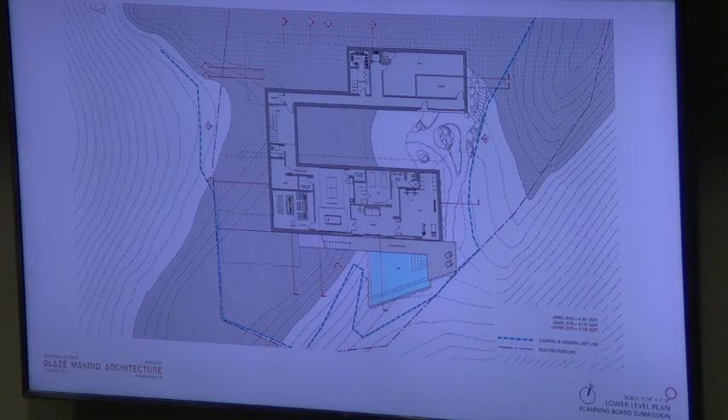We're done. So this area in here was a big focus of our redesign. You can see that the building footprint used to extend into this zone where we had a four-car garage and an exterior lower level parking court, which we've omitted. We also reduced the overall footprint of the lower level with the intention of reducing site impact and soil and rock removals. The big change, which Dan Thorpe will speak to further, was that the driveway grading no longer needs to drop down to get to the parking court, which significantly reduced the length and height of that retaining wall we discussed last time.

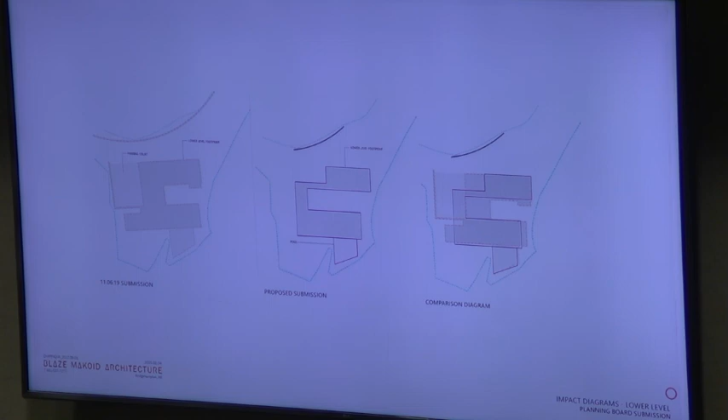This comparison walks you through the overall changes. This light gray area is the previous parking court, the previous footprint. This is the new building footprint. You can see all of these areas outside of that new footprint are no longer part of the required excavation. So the garage will be up here now? That's correct.

These are two section views that help illustrate how this was successful in reducing the soil removals. This section runs north-south through the site, so our previous driveway was grading up to the main level of the house, with lower level garage below. Now we do not have lower level space below a portion of the north wing, and we were able to regrade so that it's a much gentler slope up to the first floor. You can also see this exterior terrace view with the spa was pulled to the north and reduced in size so that we didn't need to remove as much.

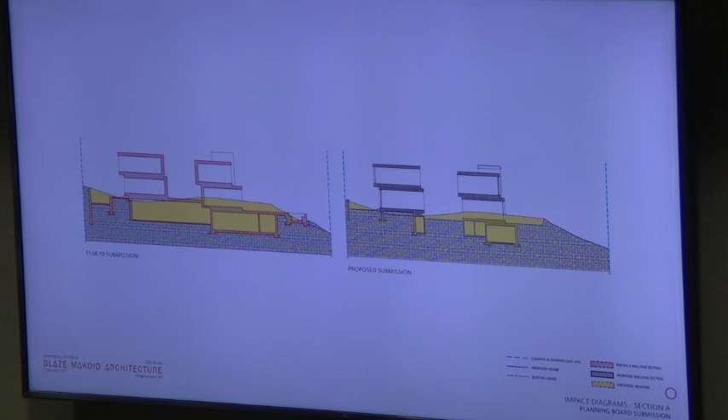Here's another view, sections that are running east-west through the site.

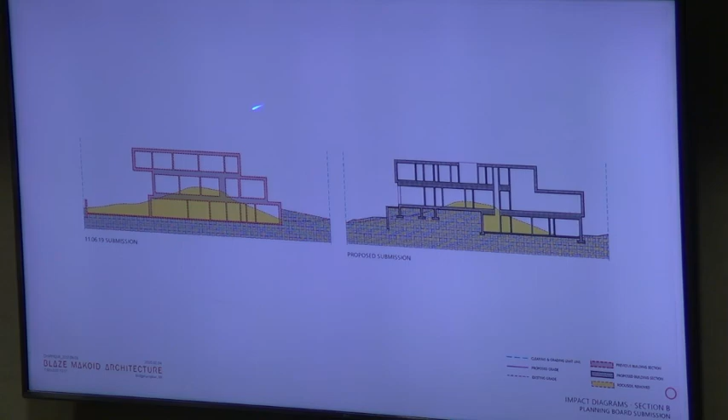And this is that exterior parking court, which no longer exists, so we're able to achieve this condition here. For the most part, that'll just remain untouched, to the extent that you can with your construction. There'll be an overcut for foundations and so forth, but to the extent that we can.

You had a cut last time in here, I thought, there was some sort of cut out there. And now you have this area that I think is proposed to be part, maybe the spa was there, I don't recall. Can I jump in?

Sure, absolutely, come on up. You have to identify and introduce yourself, because it makes it easier for the stenographer.

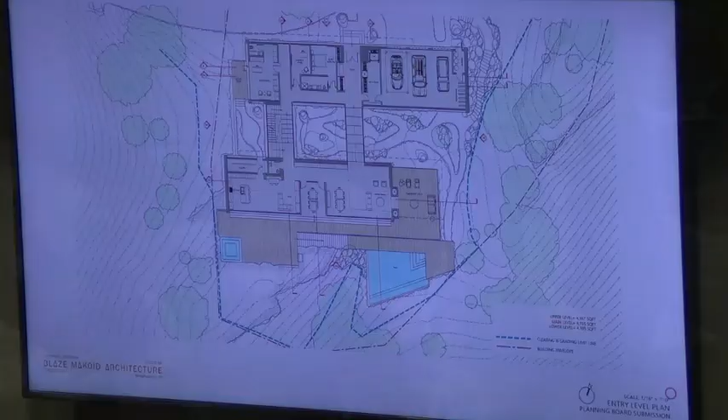Daniel Thorpe, landscape architect with LaGuardia Design Group. That area in question was a concrete stormwater planter. We've since changed it to a deck floating over existing grade, so that we can continue to honor that swale channel down the side of the building. The stormwater planters we saw as obstacles in the way of that swale have since been moved between the two volumes of the building, which Lori allowed us to do by opening that up.

So I think we're really happy with the way that these changes have affected the design. We feel it's actually strengthened the design overall. There's perhaps more clarity in the two volumes, and then these connector bars between them.

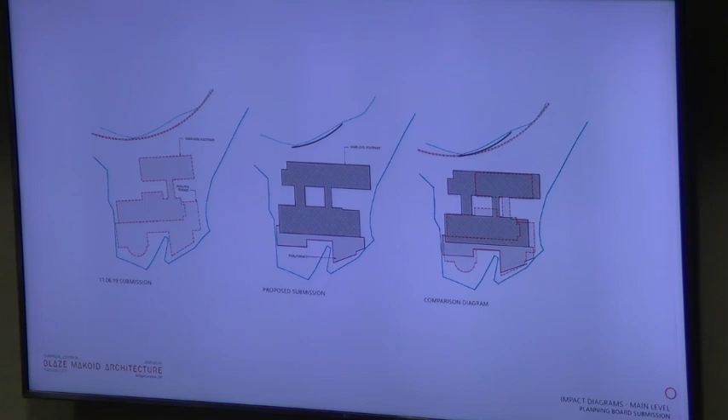This is a view of the first floor, and you can see how those terrace reductions played out before and after. We did rotate it for this overlay, just for the sake of comparison, but we did change the angle of the building.

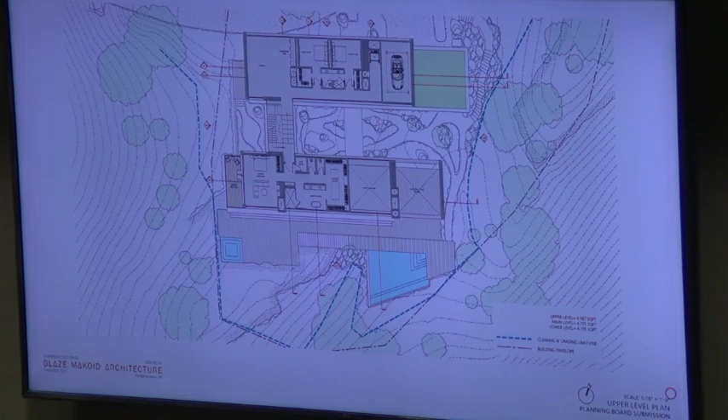On the upper level, the program has remained largely the same. The one change we were able to accommodate was because we lost one garage parking spot, we were able to install an elevated lift, connected to the garage space down below. That's basically a stacker, as you'd see in urban parking. It was a chance to claim some of that space and get everyone what they needed.

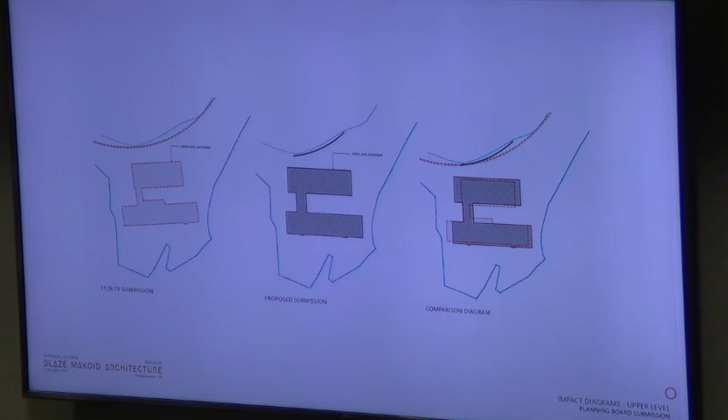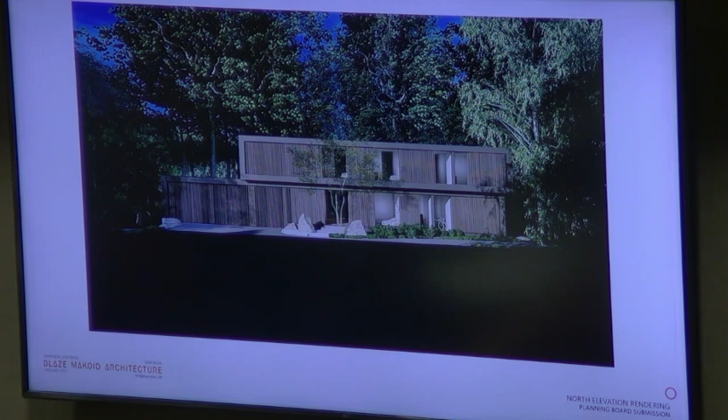And then some renderings. Here's an aerial view looking from the south back at the house. The north elevation—what we'd like to do is kind of conceal those garage doors in the wood cladding.

These next two slides address the history of our submissions to the board to date, starting with November 7th of 2018. As you can see, there's been a downward trajectory in the overall scale of the project, both in terms of GFA. With this last submission, we went up a little because of some of the logistics of moving program around, but overall the building footprint has continued to be reduced in size.

When you reference the floor area, that also could include the second floor as well, right? Correct, and the lower level. Did you count, because now you have a garage, right—is that counted as floor area in this number? We counted everything, including exterior walls and garage mechanical space. So in the previous one it would have counted also the garage parking. Correct, got it.

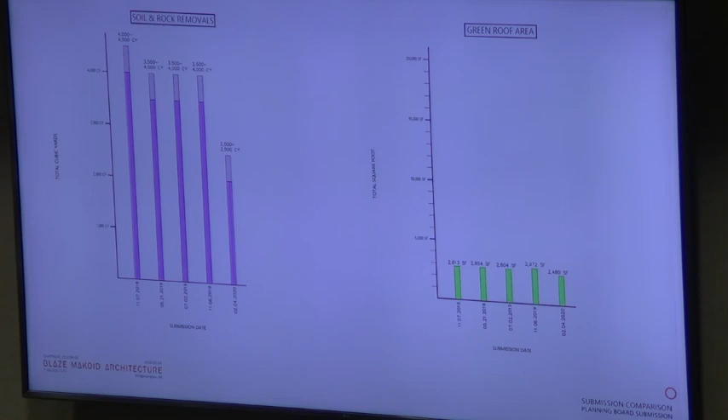This last series of slides addresses the 2002 approval in comparison with the elevations of our proposed house. I think you can really see through these diagrams how the flat roofs help to minimize visual impact.

You can also see how the house has been designed to work with the topography. It's very tasteful.

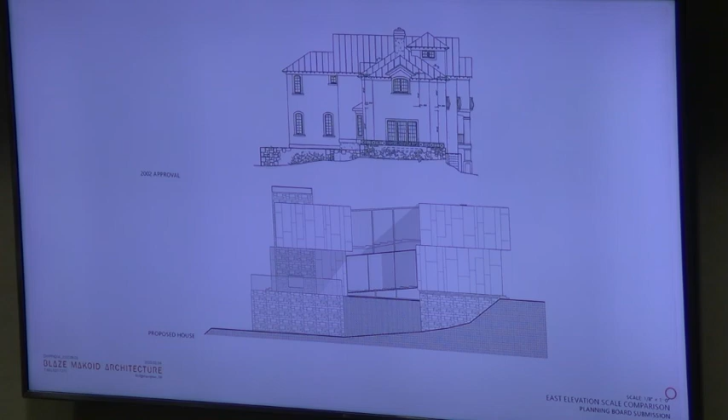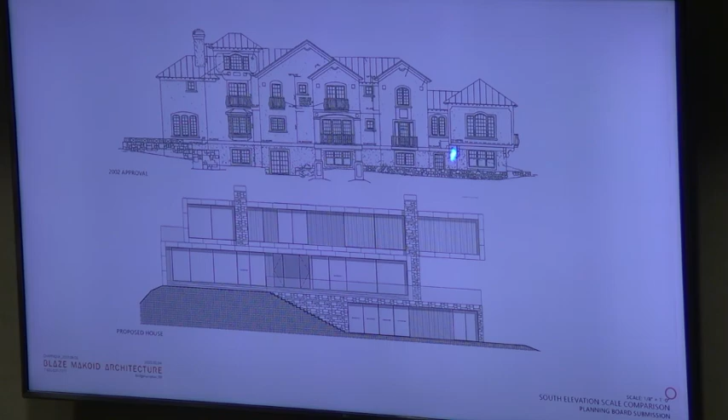This is the view of the south elevation, so this is the view that neighbors across the lake would be at least partially exposed to. I think you can see how, again, the flat roofs are less obtrusive than the gabled roofs. And also, the overall length of the building is less than the previous approval.

Didn't we also talk about the coloration too, in terms of what you're going to do with the siding? Correct, yeah, I think it will really blend in. I do not know, I can't speak to what color this was. It appears to be some type of a stucco. But we're looking at natural wood tones and deep slate. What's represented in the 3D images, right? Correct, yeah.

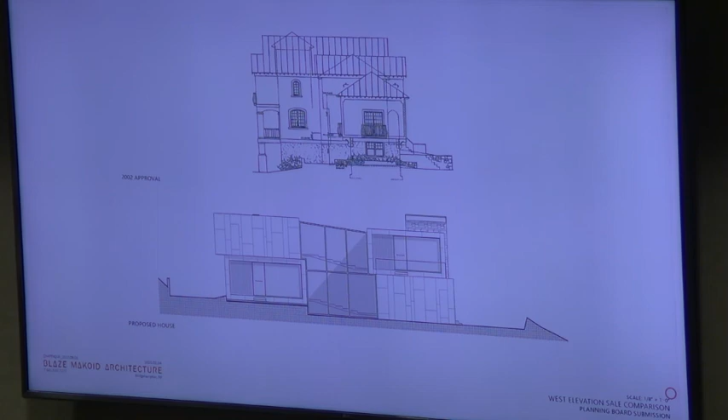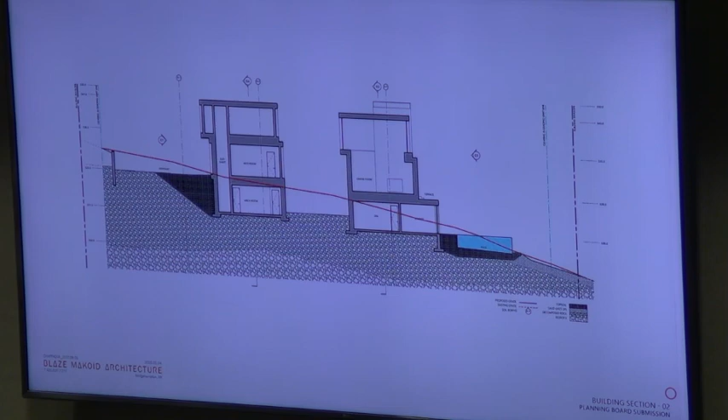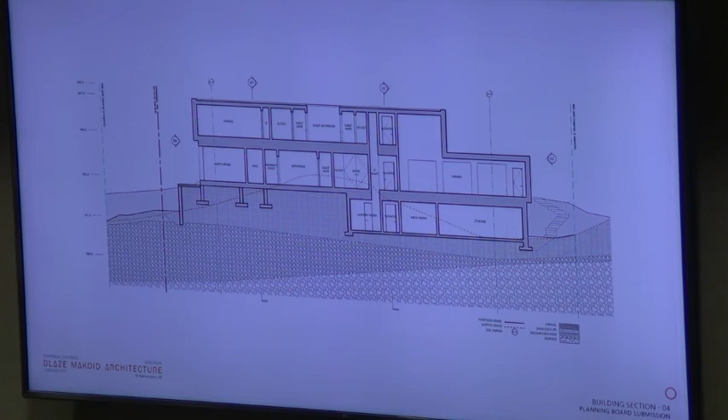And I'm going to flip through these next slides fairly quickly. They were part of our submission, so you've probably seen them already, but we included some sections of the proposed house. That red line is the existing grade through each of these sections. So this is that interstitial space that would slope down. This is a section through the north wing where we no longer have lower level space. Is there a hatch below representing different rock that's there? Yeah, it's kind of an estimation based on the soil borings that we have.

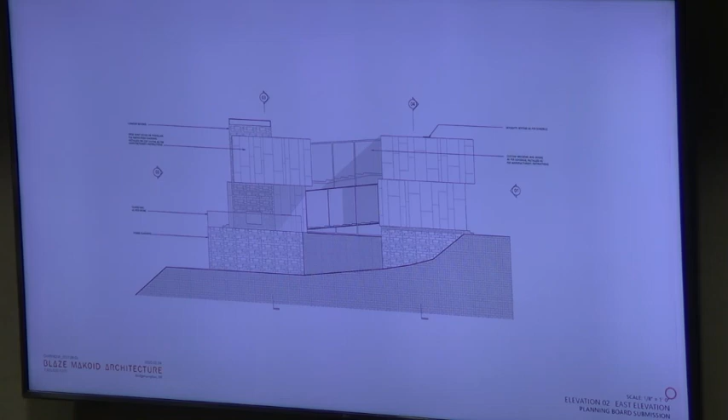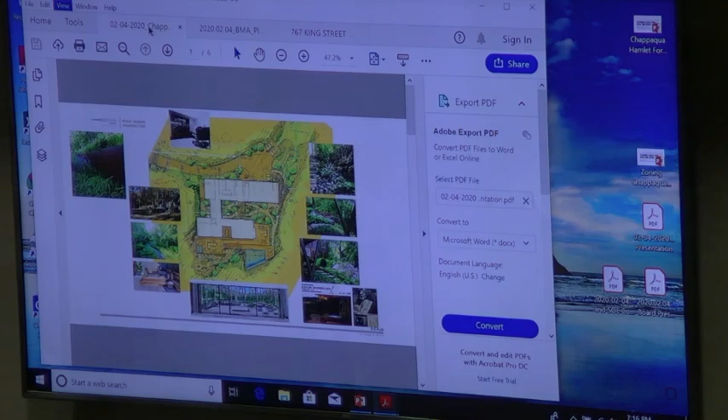You can raise the microphone, looked like it was a little low for you. Thank you. Nice.

All right, landscape. So, again, Daniel Thorpe, landscape architect for the applicant LaGuardia Design Group. So based on the revised building, we've been collaborating with Lori and her team on how to better fit the site design into the existing topography and soil strata of the site.

So one of the biggest improvements we made to the landscape plan was, here's the bridge. Before, you came over the bridge and then you swept down into the subterranean garage. You now drive up, almost even with existing grade, up to a new parking area at the front of the house. So instead of the main parking area being down below, it's up above. This had several major impacts on the overall approach to the house.

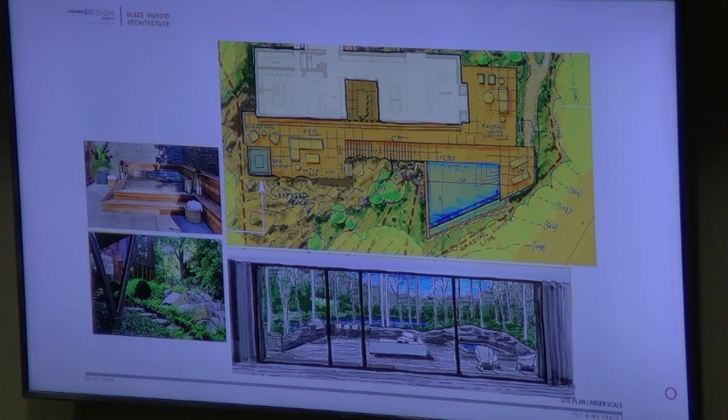Getting back to the upper area, one idea is since we'll be generating rock on site, how we might use that rock around the house. This concept carries through all our plans of bolstering this edge of the house that interacts with the existing flow channel, with hardened stone stairs and rock crushings deposited along that edge to create a more stable environment for the water to run against, as opposed to soft soil and plantings which would inevitably blow out.

This is a photo of our vision for the space between the buildings. These are all of our stormwater planters, vegetated in native grasses, Pennsylvania sedge, native ferns like hay-scented ferns, and little magnolia trees native to New York, the Sweet Bay magnolia. These little trees dance through here. So the idea is using all of the environmental devices we're employing on the site as a visual expression around the building.

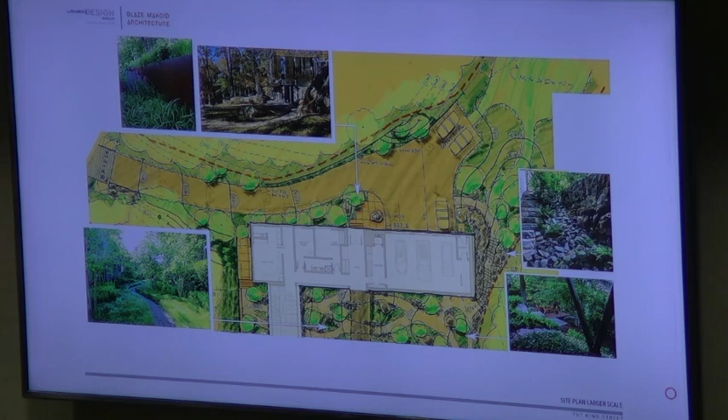This is just an updated tree removal plan showing the building footprint. The trees in red are what would be removed, and in green are all the trees that we're revegetating with.

I just want to ask one thing to make sure I understood. Do you propose to expose this rock below that area where you're going to put the spa? No, it'll be just natural, just the way it is. I'd love to leave it just the way it is. I couldn't tell from the picture if that was one of the things you were going to do below the ledge.

Why do the two trees come out? These two? Yeah. I don't know if those just escaped us as a holdover from the old application. I know we had added a few to the removals list because the board was concerned about the client maybe down the road wanting to remove a few to open up more solar exposure on the pool. So I do know we added a few for that reason, but we certainly look at keeping them on the plan.

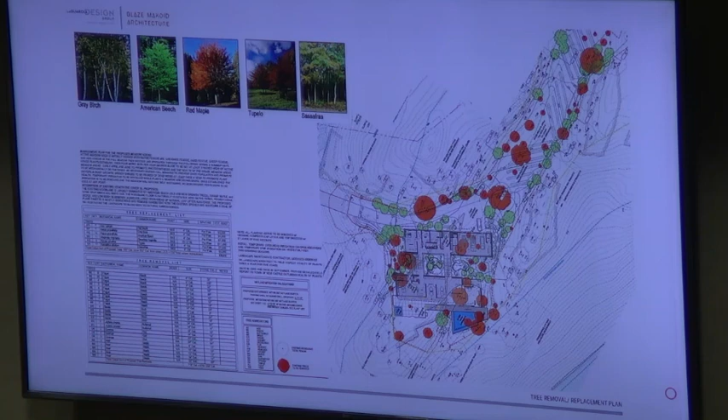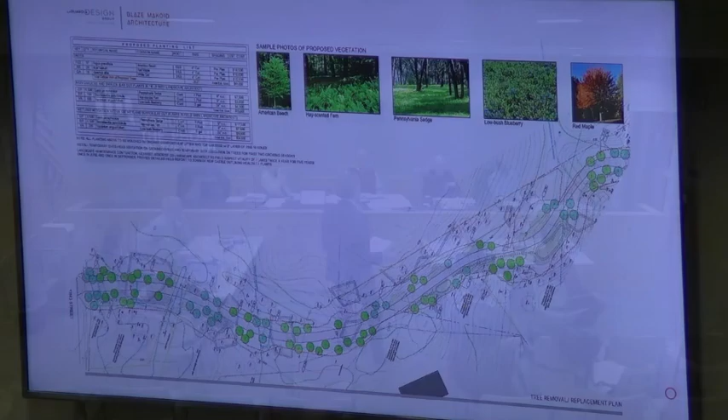This again is just the plan from the bridge to King Street, largely unchanged, entirely unchanged. But I think at our last presentation we didn't really get the opportunity to explain how we're now planting trees within the view shed from the neighbor's house, the neighbor who was here at the last meeting, trying to address her concerns through adding trees and screening between her and the driveway. This is an existing pocket of vegetation, you see the clearing line around there, that was planted many years ago. It's good evergreen screening, so we looked at these other open vistas and how we could populate those with more canopy for further screening. The view from this end of the building seems to go right up to your building.

And the elevations are pretty close. This is, I guess, at 530, and you're going to be building around at 515, something like that. Yeah, and if we go back to the three-dimensional renderings, we have a significant amount of planting between, on that side of the house. Show me, is it this one? No, it's the other one.

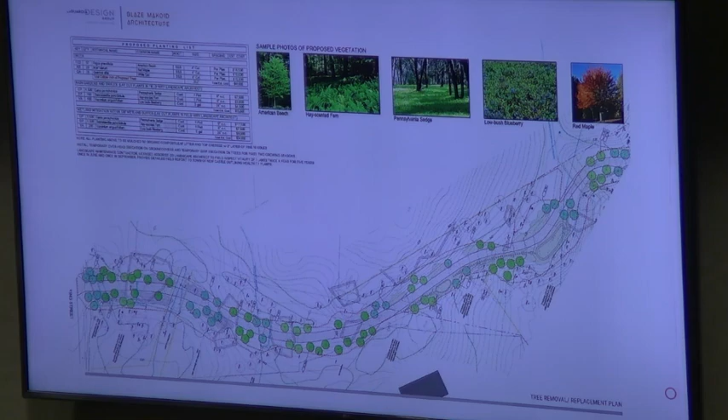I think you're at least halfway there in my mind as to what should be done. This side is of the house - eventually it's gonna be, you know, like the Mayans. They built something and then the trees came back and you can't see the stuff anymore. Which is great. But the building blends in nicely with all the views that you've created.

And I certainly can see that view shed at the bottom, but the view shed on the bottom shows about 22 saplings all around it, unless there's something else.

Well, we have the opportunity within the grading and limit line to add more trees in this zone, which is that kind of angle of attack from the neighbor's house.

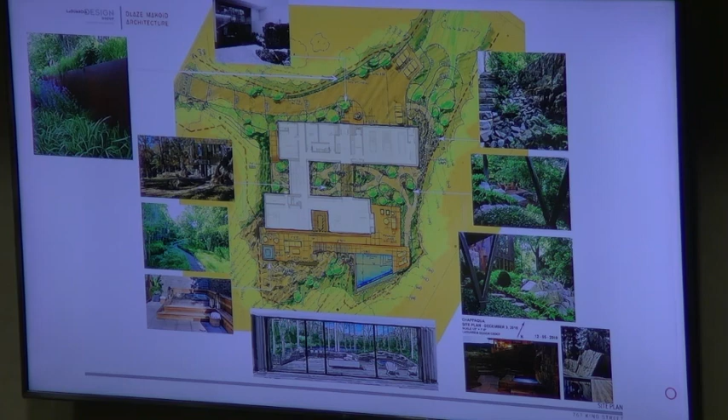In our previous submission, we included a photographic view to the west from that side. And we concluded that you can't even see the existing house in a leaf-off condition when you're standing where the north bar would be. So I don't anticipate that there will be an issue.

That'd be great, but if you could bring a view shed photo and maybe put stuff in it, that might help you decide whether you have to add just a little bit or refine the way it is. Then we have a good record for us that says, hey, this is about all anybody gets.

Which side would that be? Are there many glass, is there much glass on that side which will be lit? No, the predominant - yeah, so, where the light is gonna be - on the west side, the predominant glassy element would be that stair connector.

Okay, yes, this one, right? So is it this one? Correct, yes. That's not gonna be lit 24/7. No, so there's not that much there anyway.

And you had an image up there before that showed how far the houses are from. How far are we from that house? It looks like you're 300, over 400 feet. 490, almost 500 feet. There's a distance limit there, yeah, 500 feet.

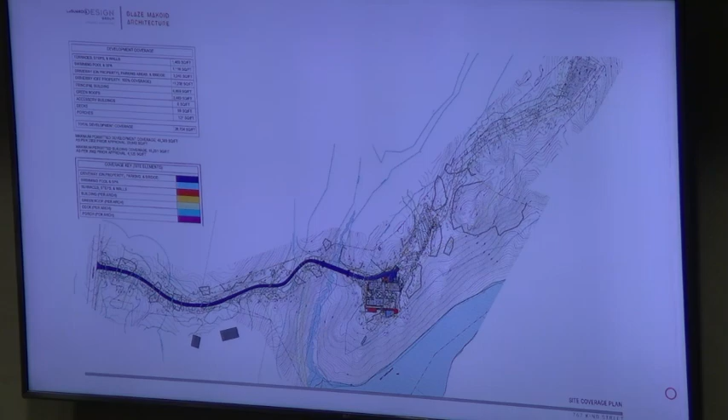Aesthetics, or I just don't know what, but I don't think they're very big because they're in the rock. Right, because trees are strong in the rock. I've been watching one for 10 years - the crack was that much to begin with, and now 10 years later, it's this big. There you go, and it's pushed the rock aside.

All right, so we can continue to look at that area. One other note before I jump off is that the swimming pool - the board had a comment about the depth of the swimming pool, and it's in our last presentation. We've since spoken with the owner about the depth of the pool and the idea that there's really no room around the pool to dive into the water, so we're now proposing the pool, instead of 8 feet deep, be 5 feet deep maximum, which alleviates the downward pressure on the slope, and I think is a good thing for site impacts.

Yeah, that's a good idea. Will that be constructed on site, or is that also something that's prefabricated? That would be on-site - that would have to be constructed on site as part of the foundation of the building.

Good, Douglas? You wanna take all your tools. All right, great, that's the flip - well, not his point, yeah, definitely not his tools. Sorry, Sabrina, you may not walk with them. Once again, Douglas Roy from GZA.

It's okay though, we have the beeper when you walk out - when you walk out, yes. It's okay, then there's a detonation, lights go off, yeah. Isn't there a detonation? And those trigger more public hearings. I do look pretty seedy looking, I know.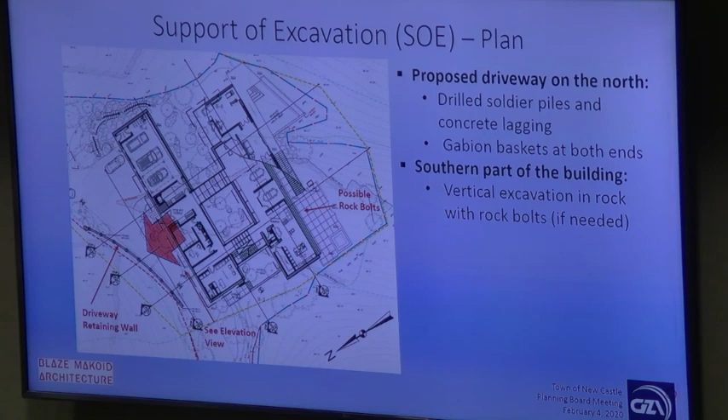So just a first plan view of the ultimate change we did, and that was reduction of this wall in both length and height, I'll go through that a little bit. We still have some other areas we're going to try to reduce overall excavation by using rock bolts to retain and not use a 1-to-1 or 2-to-1 slope, if we need to, hopefully looking at the benefit of reducing the overall excavation volumes from the site.

So with that, I wanted to show a graphic of the difference in where we had some pretty major excavation and changes in the earth retention systems. Previously we had used about 36 soldier piles, and we talked about what those look like and how those were installed. Now we've gone from a 165-foot long wall to a maximum of 60 feet, and that probably could be reduced even more depending on the system, because we don't have to excavate as deep, so we don't have to slope back as much and reduce that slope as much. So we got quite a bit of benefit by raising the grade coming through here and reducing our overall footprint of this retaining system. I think this retaining system might be an 8-pile system with some very short, 2-foot high walls on either end or something like that at this point.

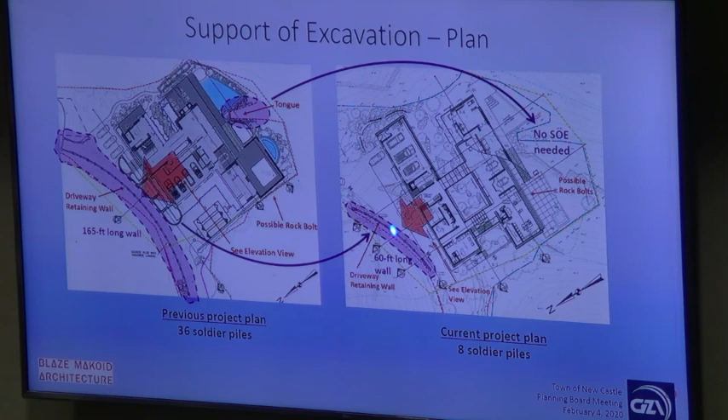To look at the overall changes in elevation - and this is not the real trees that are out there, just graphically shown - my Bob the Builder here hasn't gotten taller, we've simply made the wall much shorter. As Dan had said, we were at 16 feet previously, so we had about 1,100 square feet of wall face that we were talking about here, with rock excavation and decomposed rock excavation. We're now at 6 feet, and we've cut it down to about a quarter of the total square footage of the retention. It's much better.

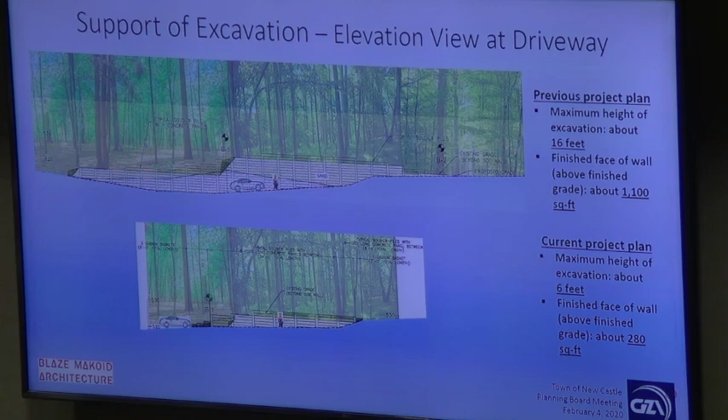Is there going to be a way around the wall for children or something that come to visit, because if they're going to play out here and there's going to be a wall? Yeah, we'll still need some sort of protection, a fence and then a railing or cover over there. I think 6 feet is still bad to fall off of, but better than 16. It's 30 inches by code - anything more than 30 inches needs it, so we'll have some sort of railing and/or fence there that will have to be landscaped across.

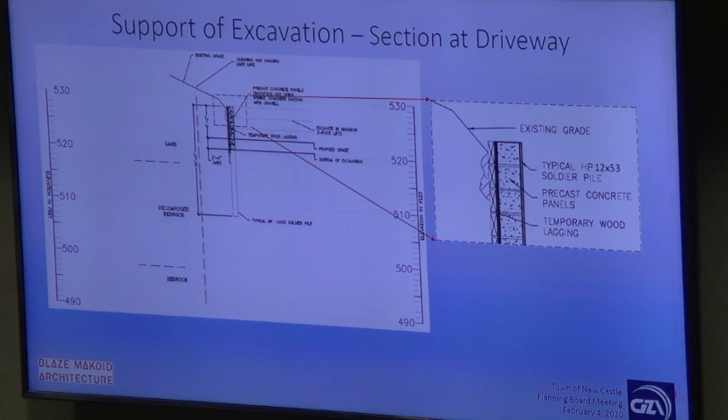It's the same sort of composite wall, we'll probably put a different facing on it, and that will be covered with landscaping.

With all the extra stone that you have available, might you consider a stone face on the wall? We've talked about it a little bit, but there's also the handling of it and where we can leave it on site, unless somebody wants to put it in a pod somewhere. Leaving it on site's going to be difficult to handle back and forth, so we're talking about it, and I'm sure we'll try to do that as much as possible.

Just showing you the difference in wall heights here, between 16 feet and 6 feet. That's a good improvement. That's it I have on that change.

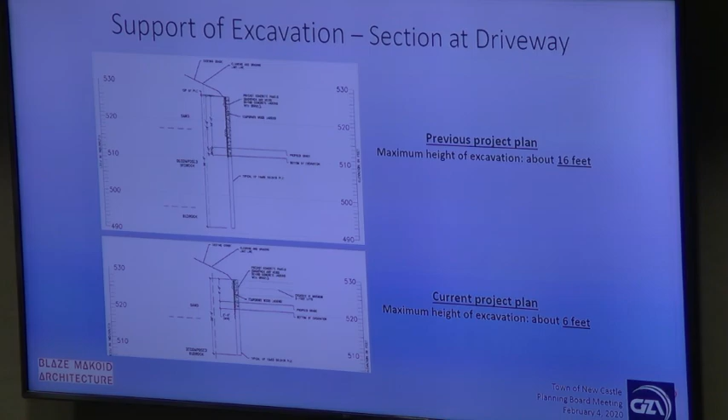Anybody else has any questions, let me know. Alan? Sabrina's tools are yours. Very clear - oh, Alan has his own? You can have both of those. Alan's won't work, he's afraid to take it. I have the red one. The red won't work. Is it only blue on the screen?

No, sorry, I'm like 9'4", like that. Only the blue ones that we have in here work. You want me to hold something for you? No, I'm fine. You can use the table, Alan.

Just checking, how are you? Good, how are you? Good evening. The last time I was here, and tonight too, I'm Alan Pilch, LP engineer, civil engineer on this project. That's great.

Is that what it's going to look like? Yep, that's cool, that's the new Whippoorwill Lake excavation there. That's Whippoorwill Lake, and then the view.

So, anyway, this repeats. That's fine, this is you, right? Yeah, if it was, I believe so. Let's see what I have here. Yeah, it's fine. I wanted to start off with just showing the uniqueness of this design. I think you put the right ones in, correct? Yes, we'll figure it out.

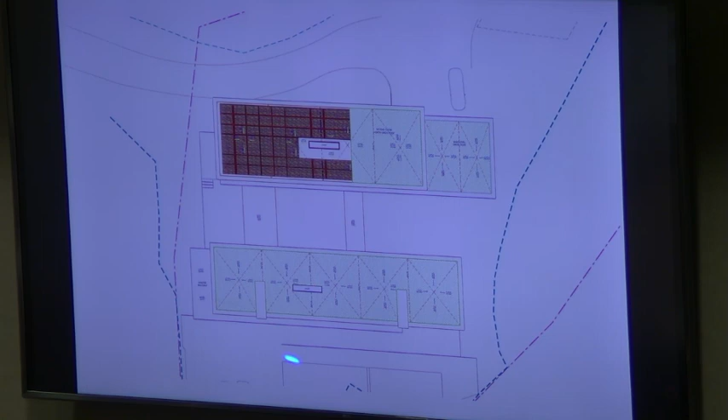The green roof areas on the north bar, this is the regular roof, I guess that's the solar panels, correct, of the north bar. This is the drive right here, there's the parking area. And these are the solar panel areas that'll be part of it, or just the regular roofs down below. Okay, those are down below also. So that's the intention here.

I wanted to at least show you what was there previously, since we've done a lot of comparisons with the 1999 Chislehurst and 2002 site development plan approval for Terry Bozes. Just to show you what was here, west of the bridge, there was all the runoff from the gravel driveway up to the bridge. There were 1, 2, and 3.

There was another level spreader here. That's all that was done with the runoff. And on this side of the bridge, there were two 20-foot length, 4x4 galleries for infiltration. That was all. There was no other treatment at all for drives or anything else that occurred there.

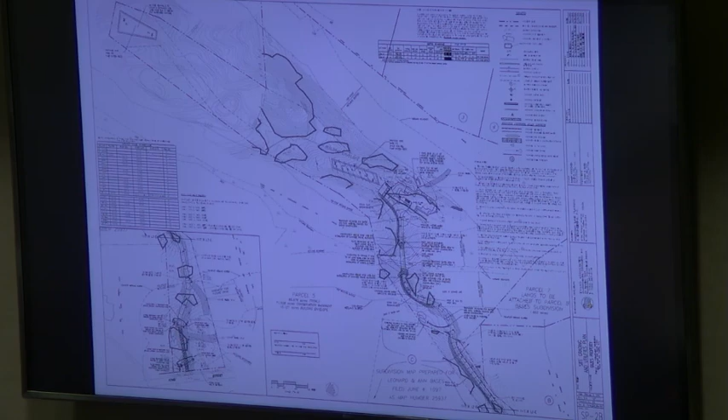So it was a very different manner in which runoff was treated on the prior project, and there was no peak rate attenuation either. The peak rate attenuation was done on the other two lots, the Hates Cross Road lot and the former Blyer, now Fitzsimmons lot at 725. That was it, that's all that was done.

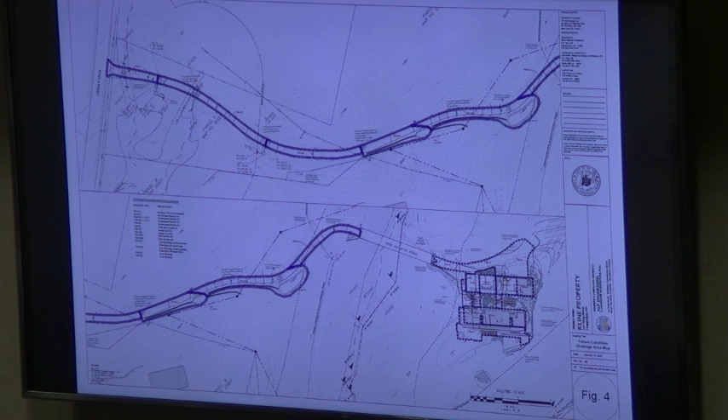Again, that just shows the entire property, including the septic area on the lot. I think here you can see a little more detail of the stormwater planters between the bars.

So what we have here, basically, are the green roof areas. The treatment of the one-year storm, the water quality volume, occurs in the green roof areas. Where there isn't a green roof, we have stormwater planters to handle the non-green roof areas, as well as the connector bars, which will drain to the stormwater planters.

The terrace below the property for the spa and the pool all drains to an infiltration facility on the east side of the building. We also have a stormwater management facility, which is actually much smaller because we have so much less surface coverage.

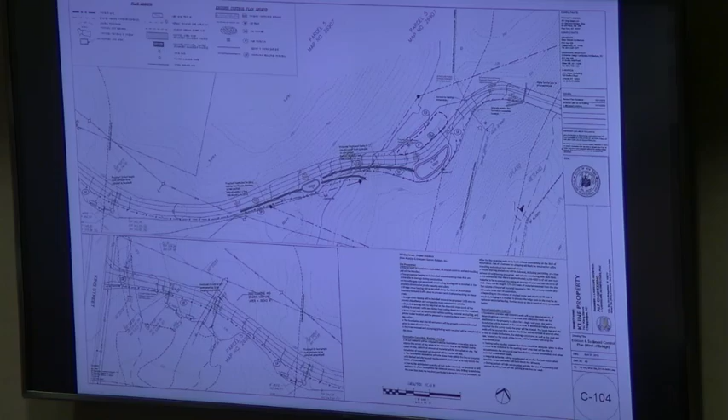As you know, the coverage is so much less that we're able to reduce the size of it. So that's actually here in the eastern portion of the bar, and it drains again, as it did previously, to a level spreader before being treated in the wooded slope that goes down towards the lake. And that's really... we already saw this one with the rain gardens.

Let me also say that one of the differences between this plan and the prior plan was rotating the building and modifying the drives. In the former plan, we used to have stormwater planters on the north side of the building, but by rotating it and regularizing the landscape between the north bar and south bar, what we're able to do very readily is create very naturalistic stormwater planters.

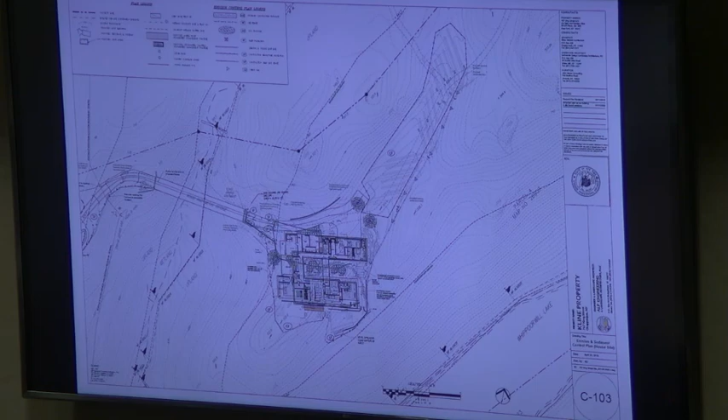Stormwater planters that take advantage of the sinusoidal design that Dan had incorporated into his plan. And that's how the stormwater management plan has evolved when addressing the issues with the redesign.

Ellen, would you say, with your various treatments and strategies here, that the stormwater treatment is actually better now than it exists out there naturally? That is, the treatment and the attenuation of the speed, et cetera, is as good or better than what we see out there right now?

When you say right now, are we talking about the undeveloped site? Yeah, I think it's basically equivalent to it. We have a decrease in the peak rate of runoff, and the volume of runoff is essentially the same going into the lake. So it's kind of like almost no change as a result. That's how I see it.

It's just, as I say, peak rate attenuation is provided across all storms. And the runoff reduction volume from the green roofs, stormwater planters, and infiltration facility means it essentially remains exactly what it is currently.

And the way you guys normally design these things, with 100-year, 50-year, 500-year storms, et cetera, those are well-defined. But for the unsophisticated person who asks, is it designed for the gully washers we seem to be getting these days, like a 3-inch downpour inside of 45 minutes? How does this work? Is it going to take care of that kind of system as well? Because you guys have these defined storms, but the storms don't always meet your definitions.

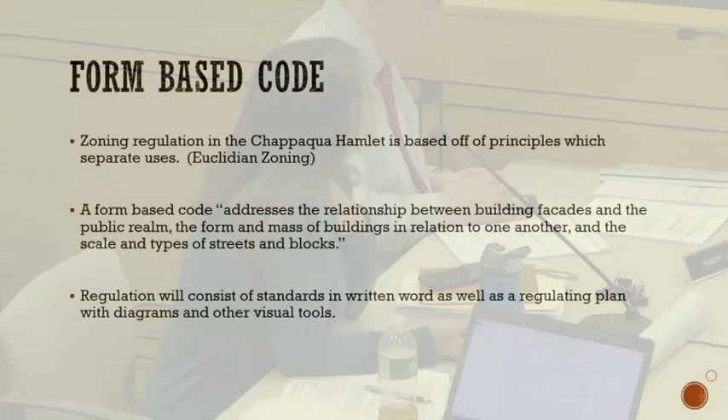So a form-based code, it's different than the zoning we have today. Today we have what's called Euclidean zoning, it's zoning by use. The form-based code is a little bit different in that it addresses the relationship between buildings and the building facades and the street. It's the public realm, the relationship of a building, what's next to that building, the buildings across the street. So it's a little bit more holistic in looking at a street and a block form.

The regulation itself is different. Right now we have a zoning code which is just words. The form-based code will actually be words, it'll be a plan or a regulating map, and it will also consist of other visual tools. There'll be pictures of architecture, diagrams of street formation. So it's a little bit more content rich, if you will, in several different forms than today's zoning code.

So this gives you a sense of the zoning in the Chappaqua Hamlet today. The form-based code covers the business retail zoning district, the business retail parking zoning district, the planned industrial zoning district, and the designed business district.

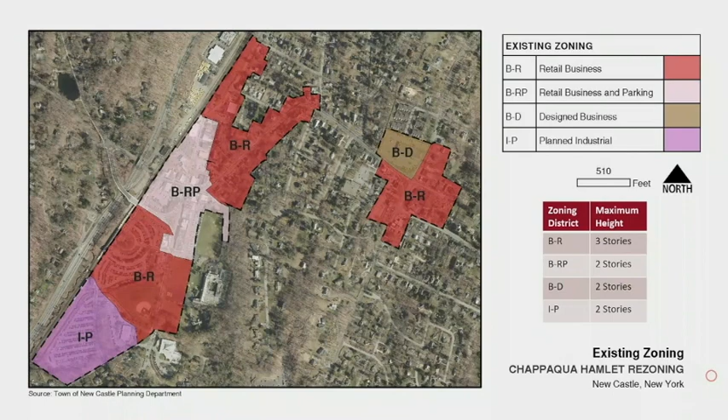These are the areas and the extent today in zoning in our hamlet. And then there's another chart right here, which really calls out the stories within the existing zoning district. So for each of the zoning districts, what the maximum stories or maximum height is.

Would you point out 91 Bedford Road? Is it BR or is it just outside? It is in BR, right at the edge here. Right there, right up there. Thanks.

And that means that where we sit today in Town Hall, there's an area within the Town Hall property, really the inner road leading from the train station, that is allowing 5-story buildings on the road frontage. So it's not the entire property, it is just an area that fronts what would be deemed a street, and then around the circle.

The only area of privately held property where we are looking at 5-story frontage would be a little bit on Woodburn and Greeley in this corner. An area on Greeley that leads up to the bridge that is privately held here but publicly held here. And then an area on Greeley on the other side of the bridge, which is privately held here and again publicly held in here.

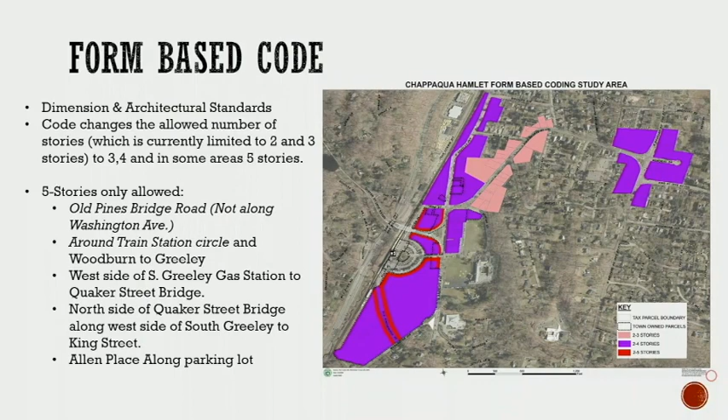So again, this is the base legislation. It does not replace state building code requirements, and it does not replace environmental code requirements. So this is like zoning today.

Let's talk about SEQRA. You guys are very familiar with SEQRA. The intent is to assess the environmental significance of all actions. The lead agency is the town board, and they are the lead agency in this effort to rezone the Chappaqua Hamlet. Their charge is to balance the environmental impacts with the social and economic factors when determining whether or not they want to pass this legislation.

This is really for the public that's watching.

We're going rogue. We're really going rogue here.

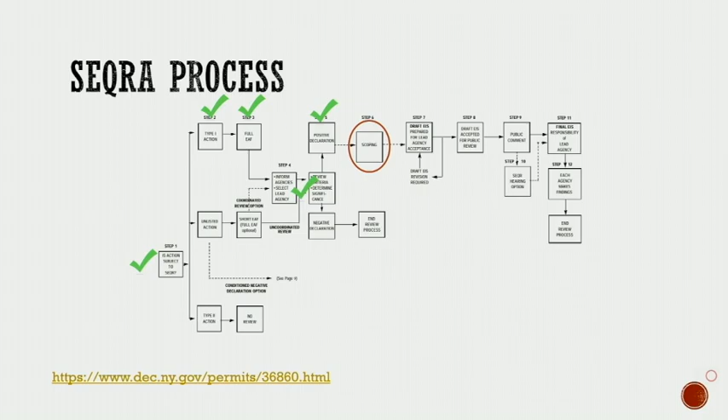Sabrina, I have a question for you. During that process, from the middle to the end, is the draft going to be reviewed too, to go to steps 3, 4, 5, and 6? Correct. Concurrently? Correct, yes. We can get into more details about what is looked at in the scope when we get to that point, but absolutely, Bob. Good question.

So, the proposed action: we're looking at an amendment of the town zoning code within the Chappaqua Hamlet. We're looking to move to a form-based district that is consistent with the goals of the comprehensive plan. 72 acres of land are affected by this zoning change, and we're looking for flexibility for development with the intent to revitalize the hamlet, creating a sustainable and successful mix of commercial and residential uses, taking account of current and future real estate markets and trends. Again, we're trying to revitalize the Chappaqua Hamlet—that is the main goal of the form-based code.

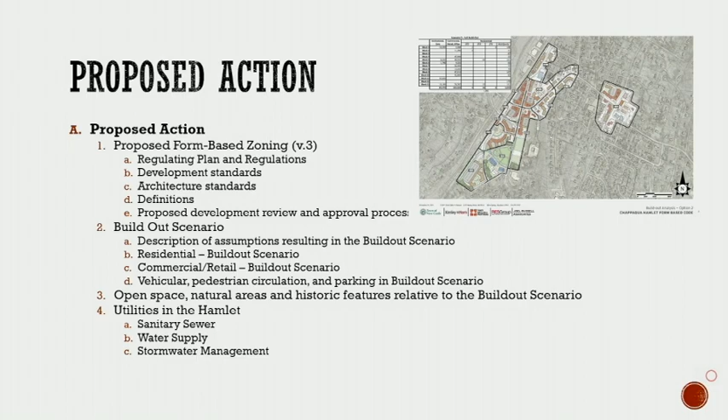More specifically, the proposed action includes examination of the regulating plan and the regulations within the draft code, the development standards, the architectural standards, the definitions, and the development review and approval process. So the code that exists on plannewcastle.us will be subject to analysis in these areas.

In addition, the proposed action also includes a build-out scenario, with a description of assumptions regarding a future build-out scenario—this is maximum potential development, because SEQRA requires us to look at the maximum impact. We're looking at residential build-out, commercial build-out, and vehicular and pedestrian circulation and parking in association with that build-out analysis. We will also look at open space, natural areas, and historic features relative to the build-out analysis, and we will look at utilities: sanitary, water, and stormwater.

This is the entire proposed action. How would the town historian be involved in this? He was circulated, as the Historical Society was circulated, as an interested agency to review the proposed scoping document. One of the entities the consultant team met with prior to producing the legislation was the town historian. And they participate in the cultural review? Yes, they do.

So, I have a question on that page. Sure. On the full build-out studies, that's full build-out, correct? Do they ever do a study that says, well, maybe we only build out that block?

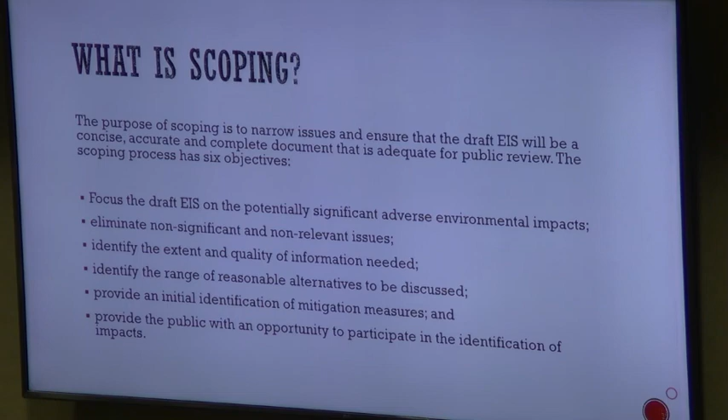So Greg, when it gets to your point of do we ever do anything in between, that gets to the range of reasonable alternatives we look at to provide initial identification of mitigation measures. We know parking is a big issue - if we don't rezone X, Y, and Z area, what does it do to parking? All of that information has to go into the generic environmental impact statement so the lead agency can understand the impacts and changes and how those changes would affect the impacts. It also provides the public with an opportunity to participate in identification of the impacts.

So here's the general sections. This is very general - the draft scoping document you have goes a little deeper in certain sections. I've been receiving comments from the public, staff has been reviewing this, we've been adding more detail. Because it doesn't have detail does not mean it's not going to be discussed, but if there are areas within the scope you want to ensure are discussed, they will be highlighted.

For example, Greg, your question about alternatives - it's not just no build-out under existing zoning and full build-out. It's build-out by removing the 5 stories, it's build-out by reducing the area of the zoning on King Street. These alternatives have all been expanded upon, largely due to public comments. We need to understand what the impacts of the parking are, the impacts of the traffic circulation, of the view shed.

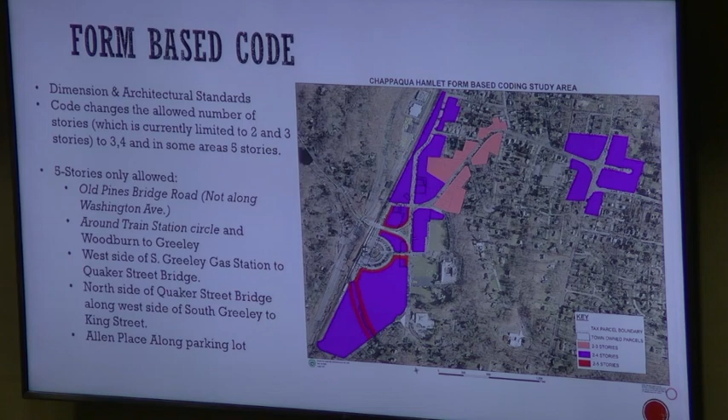The zoning drawing, I think, zones that for residential. It's zoned that way right now, but the plan that they're going to use to run numbers does not have anything on it. That's the other plan that you saw - that's an assumption I'm making.

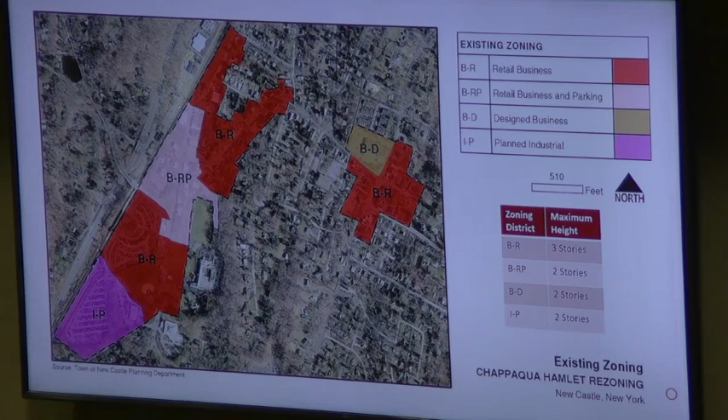We need, through the outreach process - nobody wants to see the rec field disappear. Unless that sentiment has changed, and I don't think it has, I wouldn't wager on that. I don't think so either. So I'm concerned about process here, which leads to outcomes, right? And you're right, nobody's going to want it, so why is it zoned that way?

I don't, it just doesn't make sense - nobody's going to say get rid of all the parking. Why is it zoned that way? Nobody's going to say let's move this, why is it zoned that way? Now there might be some reasonable smaller pieces of that - well, we could do some parking, maybe the ball field doesn't have to be a ball field, we want it to be a park.

Those are all part of public policy decisions that I think need to be in place in order for us to really understand what the use of this land is going to be, so that we can come up with the brackets that need to form the basis for approving this under EIS.

I didn't focus on this particular thing, and it just all of a sudden alarmed me until just the other day when I finally started to review this and focused away from the draft legislation itself. I would have raised this earlier, although in the very beginning I raised maybe we ought to be doing something different with the public land. But I'm being urgent about it now because we only have a week and a half, and I think it's a really big question.

Comments - I have some other thoughts too. Listening to my peers here, I see 6 things that are physical things that could stop the project at a certain point: traffic, schools, water, wastewater, parking, and roads. Streetscapes and a lot of other stuff can wait.

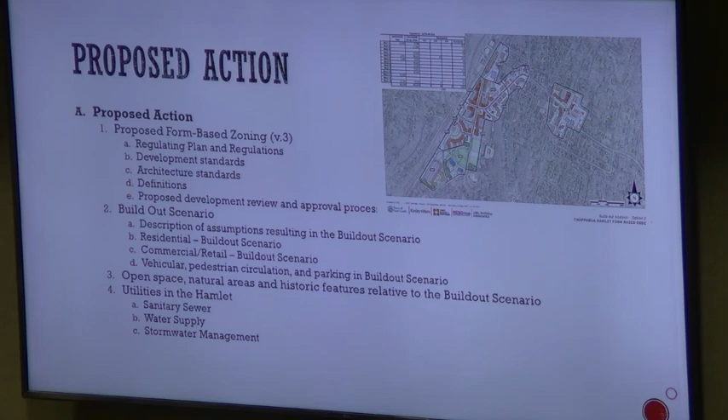Oh, I was. There was a conversation at the very beginning of this process where there was a suggestion made that we know what these numbers are. We know what the traffic numbers are. We've had traffic studies down here having to do with a number of things, and we know what those numbers are. I'm sure we have a handle on the sewer. I'm sure we have a handle on these hard numbers. And those would be the broad brackets for us then to come in and decide, okay, what is just generally the level of development that we can absorb here? And what do we want it to be, and where do we want to put it?

That's part of a master plan process that comes up with something more definitive than just broad brush zoning, that you can take with more specificity. It's like a PDCP, but that doesn't have to be that detailed, into this kind of a process and end up with a result which, it seems to me, would take less turmoil, and you'd be starting at a place where you're more likely to end up than someplace where you're getting on a train but have no idea where it's going.

But it would still probably be a two-step process. So you say, here are the blocks that we have right now. So we then have to weave words into whatever this is going to be that say these are blockages in general. You can have a share of it that's proportional to the amount of space that you're going to take, and if there's any goodies left.

But we have to think about the rest of the community also. Are they going to get water supply, or are they going to be stuck in wells like there are in the outer areas in some places? Well water is not that safe these days, not around here. So there's a whole bunch of things that you might get stuck on. There might be 2 or 3 that you're really stuck on, and a developer has to know that this is a sticking point for him to come in and say, well, my project will be net zero on all of these things. We're gonna train our residents to drink treated sewage and things like that. I'm being a little outrageous here, but so that it's a no net loss.